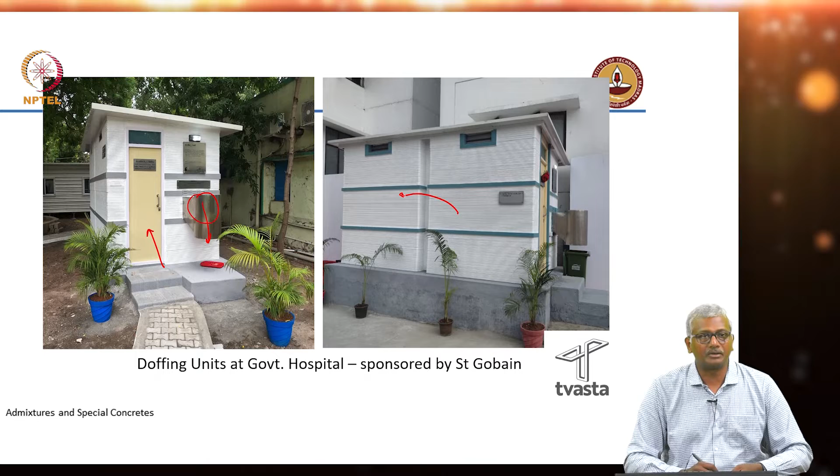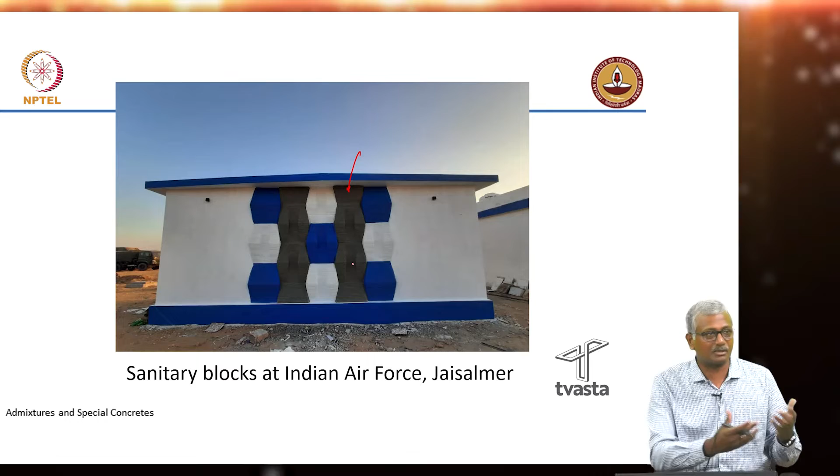Then Tvasta also built these toilet blocks for the Air Force in Jaisalmer. An interesting concept of design was adopted for the walls here. The inspiration was the step wells in Rajasthan, and you can see the features which don't exactly meet with the step wells, but the idea originated from the step wells of Rajasthan. Another picture of the same wall.

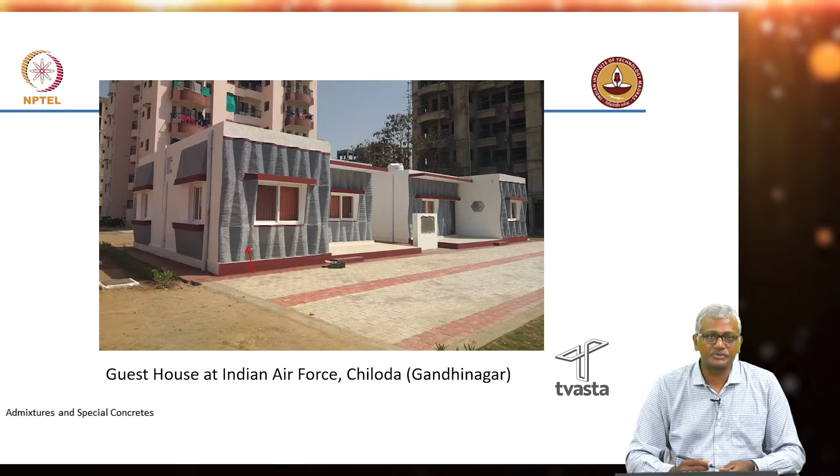So in this case, they actually took the printer to Gandhinagar, set it up there, and they were able to deliver the entire project, including 2 houses, in a matter of 30 days. So again, that was a significant achievement. Again, another picture of the back of the 2 buildings.

And this was an interesting bus stop designed for Godrej. It stands inside the Godrej campus in Mumbai. 4 elements were printed. This is one, this is the second one, there's a third one, and fourth one. As you can see, it has a double curvature in this direction and in this direction. So there's a significant bit of reinforcement that is necessary to ensure that the concrete does not fail.

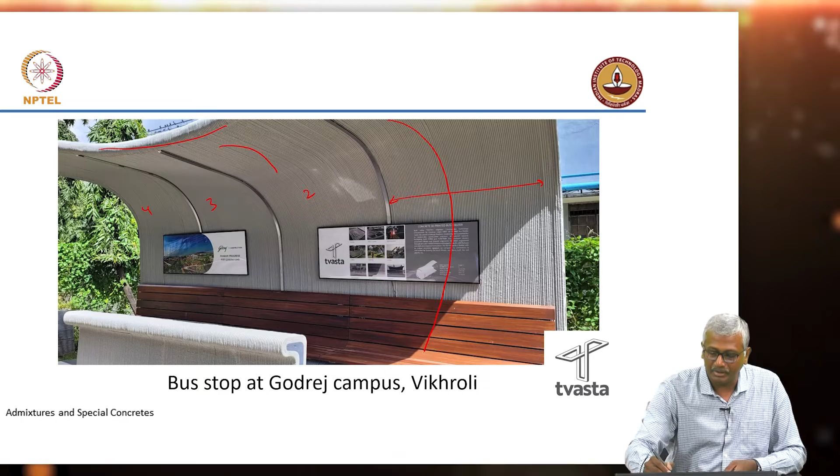And this entire segment, for instance, this first segment, which comes like that and comes to the base and then like that, this entire segment was cast at once. The entire casting was done at once. So layers were placed, and then the reinforcement which was required to take the tension in the curved part was also put in between the layers and embedded, and then continuously this concreting was done. This entire segment was then carried in piece and put together for the bus stop.

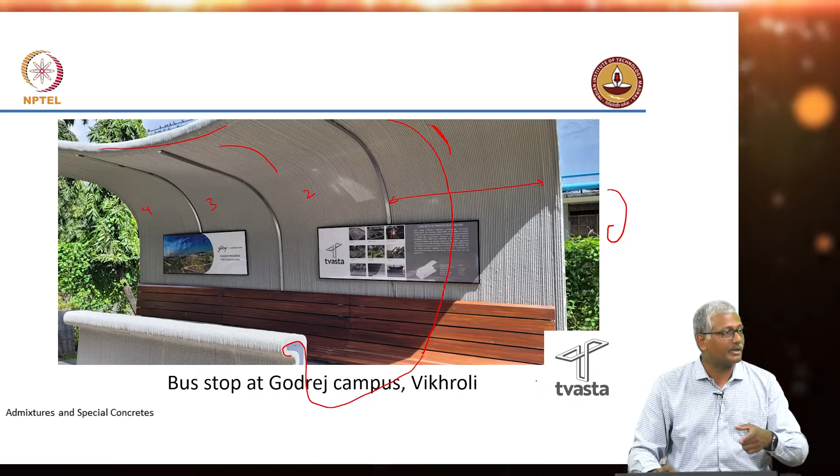In the profile, this thing looks like a G. So that's what it looks like in profile, G for Godrej. So they wanted the profile to be like that. We are getting, I think, similar construction done for some bus stops in Chennai also, and in IIT Tirupati also they placed now a bus stop like this.

Okay, so there are several other structures that they did for India Cements that's quite popular. If you go on the Santhom High Road towards the Marina Beach, outside India Cements building, there's a nice monument that they've actually done. It's called the Ananta Siras. So it's 4 snaking arms of 3D printed concrete going up to a height of about 3 to 4 meters. That was done for the 75th year anniversary of India Cements.

And also, if you make your way to one of the IPL games in Chennai, the new boundary wall close to the main entrance of the stadium has been entirely done in 3D printing. That's really very interesting structure also.

Right. So talking about what 3D printing can do is exciting obviously, because there's a lot of interesting projects that we can realize with 3D printing. But one thing you would already realize is, how do we actually reinforce these kinds of structures? That's definitely going to be a major challenge. We'll come back to that later. But before that, let's talk about the concrete itself.

So for 3D printing, there are several parameters of concrete that are extremely important. One is pumpability. Like any other concrete, 3D printing concrete also has to be pumped through the delivery system to the point where the discharge is actually happening. When it is discharging, it has to maintain its shape. It should extrude from the nozzle, maintaining its shape. It should have sufficient internal stress to maintain its shape.

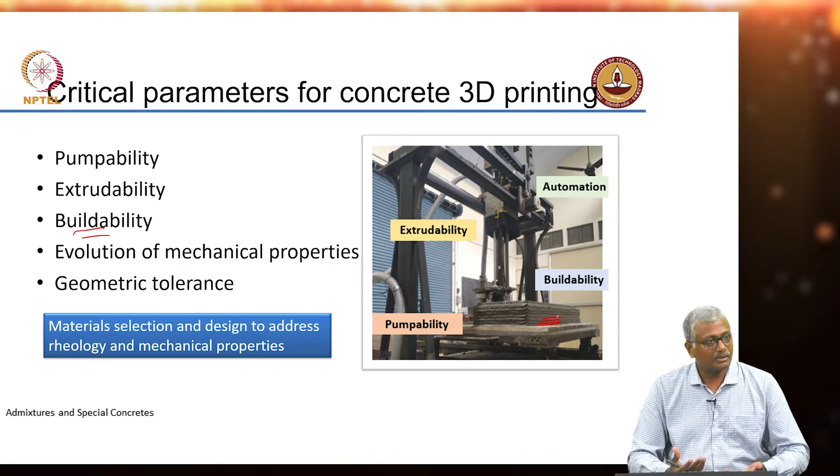Let us say some layers in between start squishing out and your entire placement starts shifting a little bit. The center lines of layers are not perfectly matching. In that case, you will still get some geometric intolerance that may lead to failure. Okay. So, it is important to do a good material design, and this design should address rheological characteristics and mechanical properties. So, your rheology, which we learnt earlier, which was crucial with concrete such as SCC, again is important with respect to 3D printing. So, here we have a slightly different concept.

You remember in self-compacting concrete, we wanted concrete of almost zero yield stress, right. Concrete should simply start flowing as soon as you pour it into the formwork. Here we want the opposite. You want the concrete not to flow at all when you deposit it. At the same time, the concrete should be able to get pushed out of the nozzle. If it is too stiff, pushing it out will be extremely tough, right.

So, that is what exactly we mean here, that the rheological characteristics are slightly different as compared to when you deal with SCC. So, generally, while extrusion viscosity needs to be low and perhaps even yield stress to some extent should be not very high, once you deposit it, the yield stress development inside should be quite rapid and it should build up its own internal structure as soon as possible. Generally, we want high yield stress for buildability and low viscosity to allow extrudability. So, it should be able to push out easily from the nozzle. So, it is a little bit on the opposite side as compared to your self-compacting concrete.

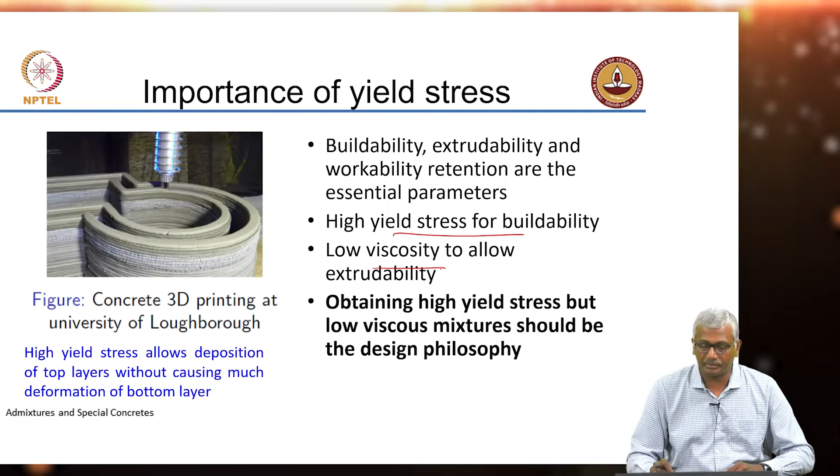Now, yield stress measurement, we have discussed this previously also to some extent. So, you can do it using a rheometer, using the creep and recovery test. Okay. So, you are applying some sort of a shear constantly over certain time, and after you remove that shear, the material is able to recover somewhat. If you are beyond yield stress, if you cause the sustained shear on the sample, it will not recover that shape, it will continue flowing.

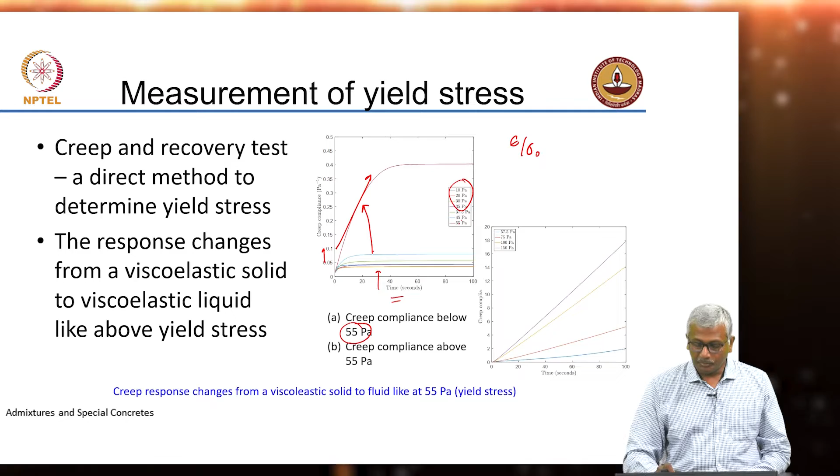So, your yield stress basically can be taken from a creep and recovery experiment. Here in this case, 55 Pascals could be considered as a yield stress. The other possibility is to use your stress growth experiment like what you do in your vane shear test. Like in vane shear, we have the vane rotating at a constant speed, and with respect to time, as soon as we start rotating it, it is trying to push the material which is resting and getting it to move.

So, that is why your stress builds up to a maximum level, and then once you obtain a consistent flow of the material, the stress reduces and then remains constant. And in this test, in the stress growth test, the yield stress is taken as the peak stress.

If you remember our discussion of SCC, we called two types of yield stress, static yield stress and dynamic yield stress. So, what would this be correlated with? Static or dynamic? This is static yield stress, right? Dynamic happens when you shear it, lower the shear, shear it again, lower the shear, and finally the amount that it settles on at the end is called the dynamic yield stress. That is much lower than the static value.

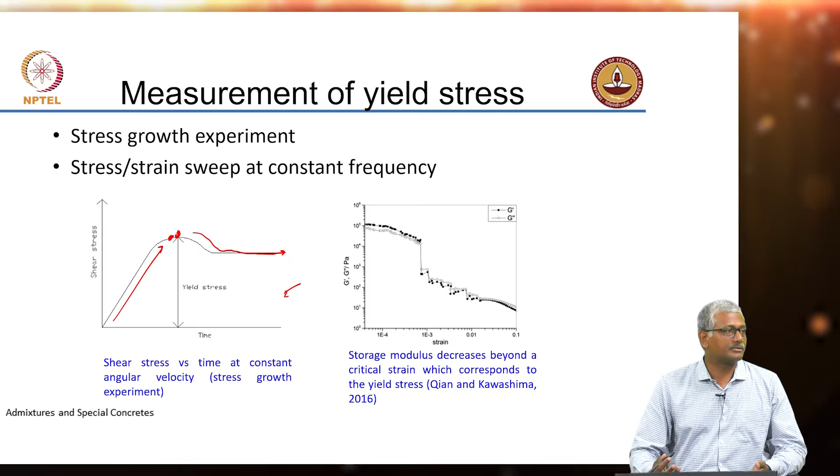So, there are several ways of using a rheometer to determine the yield stress, but a simple way for most 3D printing applications is just to use a vane shear test. Using a vane shear, you can actually determine the yield stress quite accurately. Now, once you put the layer on, it starts developing an internal stress. It is not hardening yet, because as I told you, you need to put the next layer before the first layer has even started setting.

In fact, in real construction operations, we are talking about a time gap between first layer and second layer of only a few minutes, 5 to 6 minutes, that is it. You place the first layer, the printer goes all around the building, and by the time it comes back to the same location, it will be about 5 to 6 minutes, because most printing happens at a speed of about 50 to 150 millimeters per second. So, imagine 100 millimeters per second means in 10 seconds, the printer has already moved by 1 meter.

So, for it to come back, depending on the size of the building and the peripheral length that you have in the building, by the time it comes back to the same point, it may be a matter of only a few minutes. But within those few minutes, your material should exhibit some internal stress buildup. Why? Because when the next layer comes on top, there will be added weight, which will push down on the bottom layer. And that added weight will cause the bottom layer to start spreading out, right.

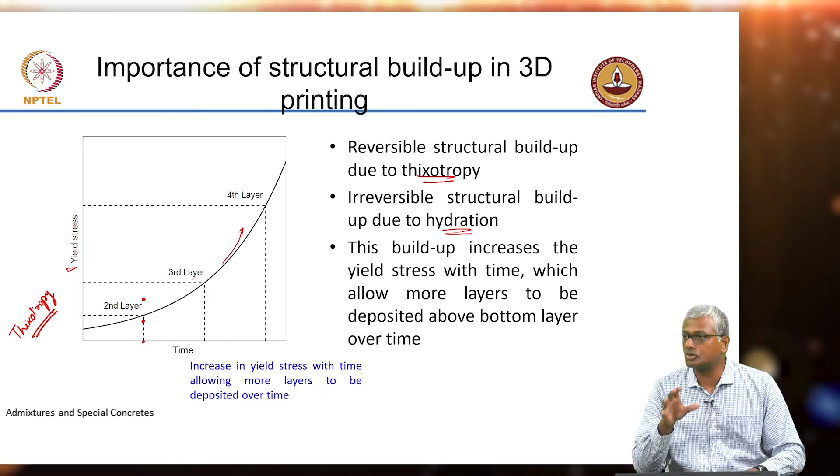Unless you have a rapidly hardening or rapidly setting system, in which case there will be some irreversible structural buildup also because of hydration. If you are using a high strength cement for instance, it will start reacting very fast, right, and in such case the yield stress development will not just be because of the thixotropic nature of the material, it will also be because of the hardening that happens because of hydration, right. So, all of these studies need to be done before you really define the properties of your system.

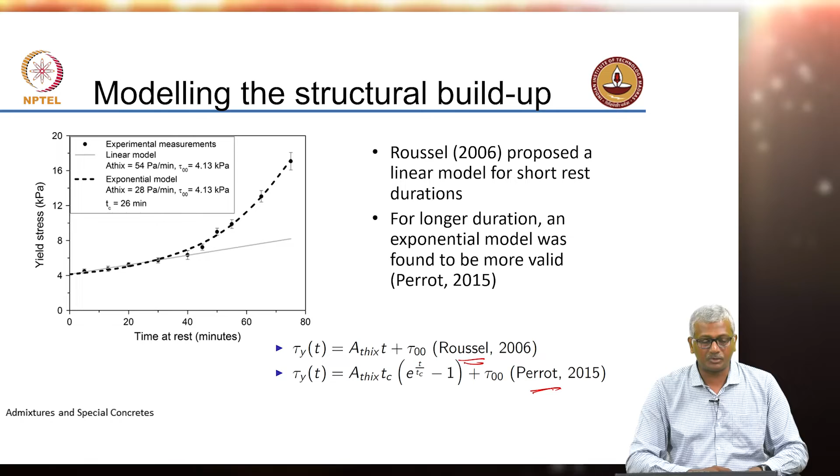So, structural buildup can be modeled. There are existing linear and non-linear models which can be used. So, here for instance, there is a model by Roussel which is a linear model, and there is a model by Perrot which is a non-linear model. So, various different models seem to fit quite well with the experimental data that have been generated for concrete systems with respect to the yield stress development with time.

If you had a circular nozzle that opens right at the bottom, that will push the concrete into the next layer. So, in this kind of a system, the bond between layers could be a bit of a problem. But if you have a circular nozzle which pushes the concrete down into the first layer, you can overcome the bond effects to some extent.

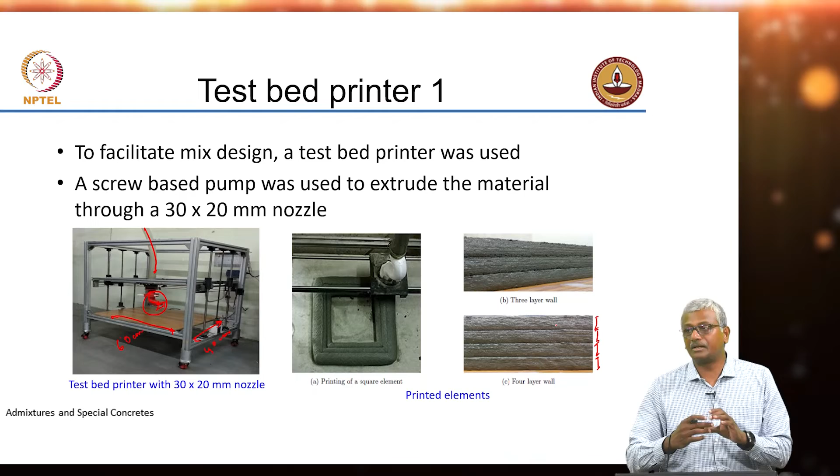So, using this, several different types of elements were cast. You can see a 3-layer wall, and you can see that the height of the layers is fairly consistent. In the 4-layer wall, you can see that the height is fairly consistent. That means the system is buildable. The mix design is suitable for building up with 3D printing. Extrudable because the material is coming out with a definite shape and maintaining that shape. That's basically how you define extrudability.

As I said, for a material to be extrudable, your layer dimensions should be consistent throughout a length. So, in this case, we printed a length of 12 inches or 30 centimeters continuously and saw that there were no distortions in the extrudable concrete mix. But here you can see there are a lot of distortions. So, this is not an extrudable mix. An extrudable mix will have a consistent shape and size when you print it.

Buildability, of course, you can measure the heights of the layers as and when you add the next layer onto it. So buildability can be seen by the number of layers that can be deposited without causing a failure. I'll come back to that point towards the end of the lecture also.

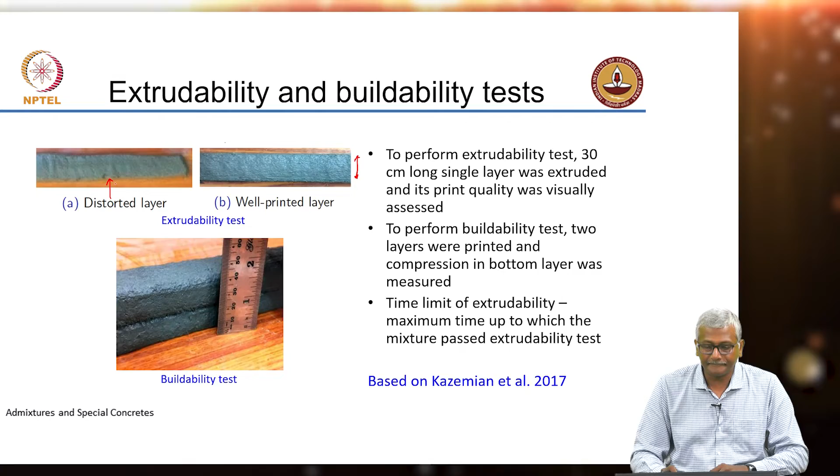One thing you must remember, of course, I can always improve the buildability by waiting a long time before I pour the next layer. The layer below will get somewhat hardened. Then I place the next layer, I will not get a problem of changing dimensions of the layer. But the problem there is your productivity has gone down, and secondly, the bond between layers also will go down if you wait too long. General thumb rule is that before the surface moisture on the layer dries up, you should place the next layer.

Why? Because moisture implies that there is still some freshness in the material, and at that point bonding with the next layer will be better. If the layer starts drying up and there is no surface moisture left, you will not get a good bond with the next layer. So, it is very important to have a proper placement strategy.

Here we wanted to look at a mix design and decide whether it is robust. Now, this robustness is something which we touched upon in self-compacting concrete also, but it is a very important feature of any concrete mix design. Robustness means that if you take a concrete mix from lab to site, it should act the same way, irrespective of the small variations that may happen on the site because of the deficiencies in your batching equipment. For instance, if you put 5 kilograms extra water, the mix should still be able to get the correct workability range, the correct strength development and so on.